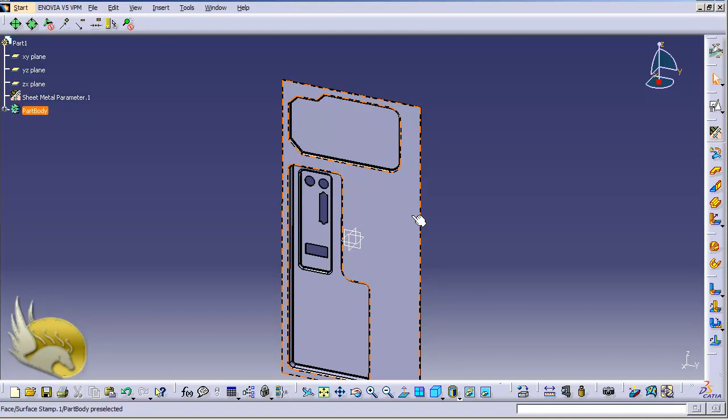Now the next thing that I want to create is the holes on this face for air ventilation. So I can go to insert menu, select cutting submenu, and can find hole tool here. The first thing I want to do is to click somewhere here, for example here, and now you can see that this is the exact tool that you use when you are creating holes on solid objects.

So this is easy to click on this position sketch and sketch out the point that you want to have. Or you can do as I do. I can select this face and go to sketch environment. This is my preferred point because I can click on a point and put the point somewhere and add some constraints to this point. You can see that this is selected.

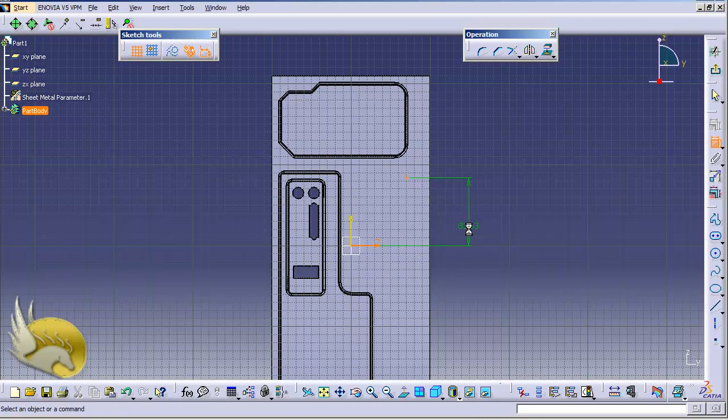I select the constraint tool and select the vertical or horizontal axis and put some constraints here. Both are going to be 80 millimeters. So this is the point, this is the vertical axis, and it is going to be 80 millimeters as well. Now by selecting this and fully defining this point, I can get out.

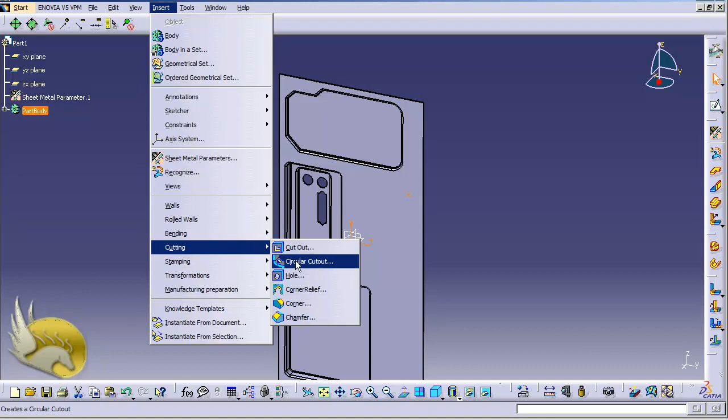I can go to insert menu, and by selecting insert menu and going to cutting submenu, I can select the hole tool. Under hole tool, I can select the face. And now that I have selected the face, instead of selecting this point, I want to select this point. Or let's cancel this out. Better to go to insert menu again, go to cutting and hole. And first of all, select the point instead of selecting the face.

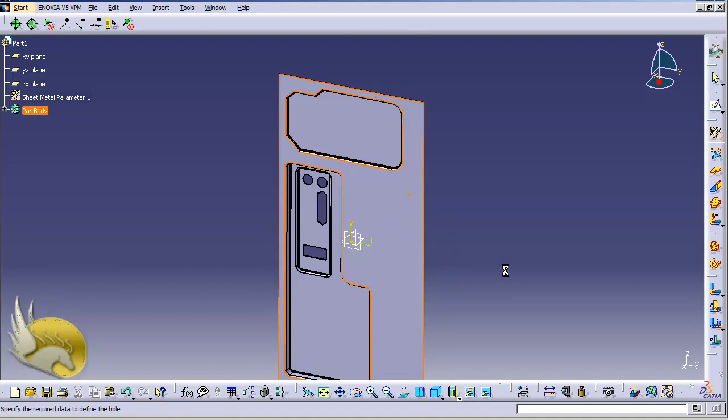By selecting the point and then selecting the face, you can see that the point is exactly where I want to have it. The diameter of this point is going to be 6 millimeter. And the depth, I don't want to have depth because I want to select it from up to last type. So by clicking on OK, you can see that there is a hole here. Okay, I can open the part body, go and hide sketch 6, and you can see that the sketch is gone.

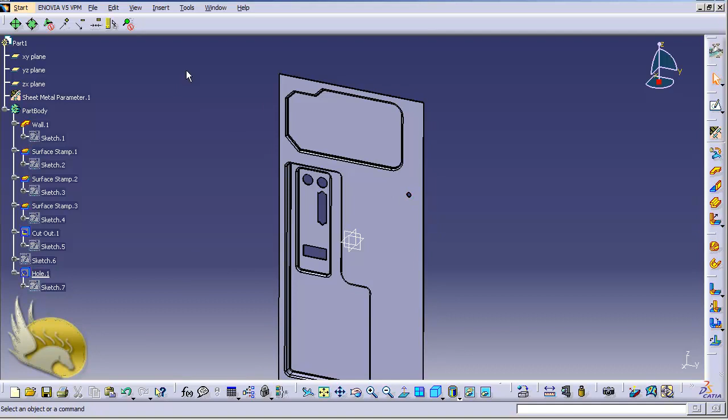The next thing I want to do is this. I want to replicate this hole. So I will go to insert menu, go to transformation and select a rectangular pattern here. The first thing I want to select is the hole that is going to be replicated. The hole is selected. Now I can have 12 instances in one direction and 8 instances in this other direction. So in first direction I select 8 instances, and they are going to be 12 millimeters away from each other.

I highlight the reference element, and this is going to be my first direction. You can see a preview of this. If you're not happy with that, you can click on this little arrow and this will change the direction, but I'm happy with that because this is the correct direction.

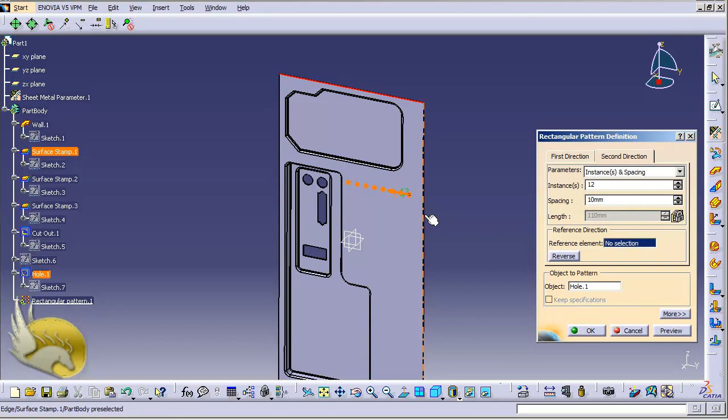Now I go to second direction because I want to have different rows of this. I want to have 12 rows, and each row is going to be about 10 millimeters away from the other one. And the reference element is going to be, for example, this line. I can see that the correct direction is selected.

That's okay for me. If you want to remove some of these holes, you can zoom in, and you can find some points inside these holes. If I click this point, you can see that this hole is going to be removed. If I click again on that, you can see that the hole is coming back. Now by this, I can have some patterns of my selection. That's okay for me. I can click on OK.

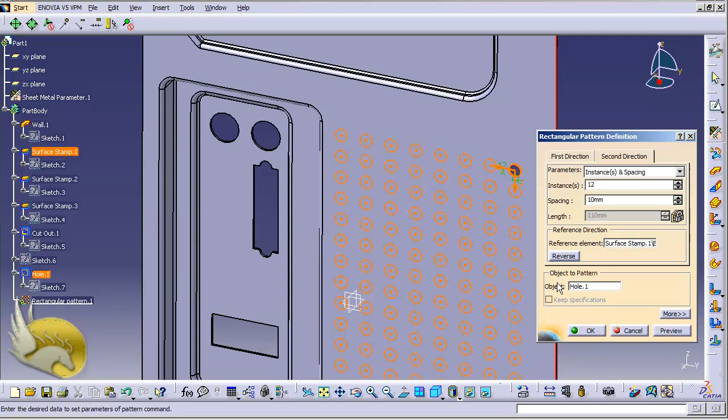Now the holes are generated for me. Okay, let's zoom out and pan down a little bit. Select this face. I want to cut some other types of holes here. So I go to sketch environment and start drawing an elongated hole here.

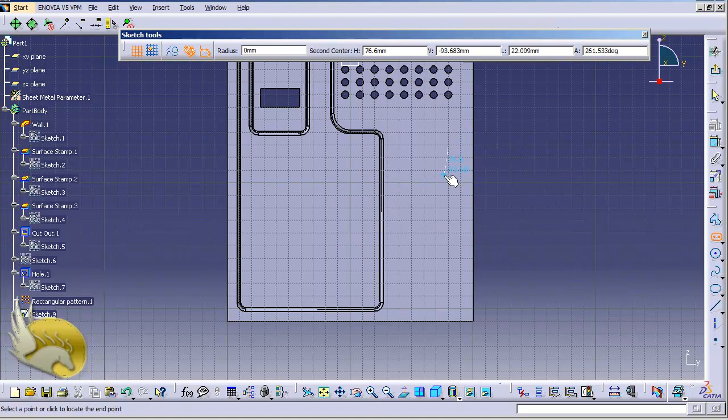So I can go to insert, go to profile and select the elongated hole here. Let's find the elongated hole, and I draw an elongated hole here. Let's zoom in because I want to have some constraints here, or I draw this like this and have this like this. By paging up, I can go and remove this constraint. I don't want to have this.

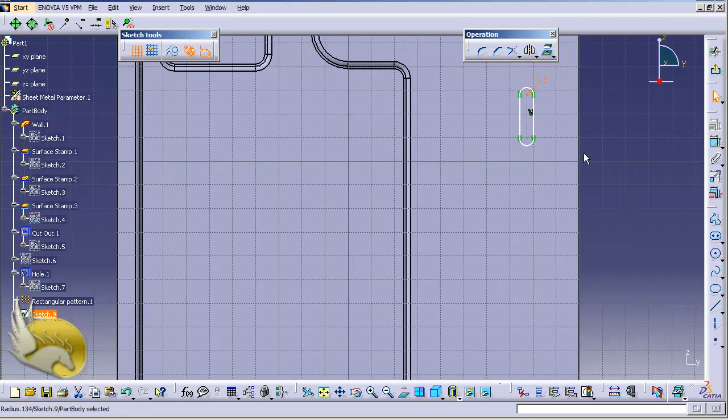By removing this, I can select the circles, and the diameter is going to be 6, so the radius is going to be 3, and this line is going to be 15 millimeters. So I double click on this and make it 15.

Now I want to have some constraints, and this is going to be about 85 millimeters. For example, I can select this line and select this vertical line and add a constraint here. This constraint should be 85.

And I want to select this top point, that means the center of the upper arc, and select this horizontal vector and add another constraint. This constraint is going to be about 70 millimeters. Now that's it. So I exit my workbench.

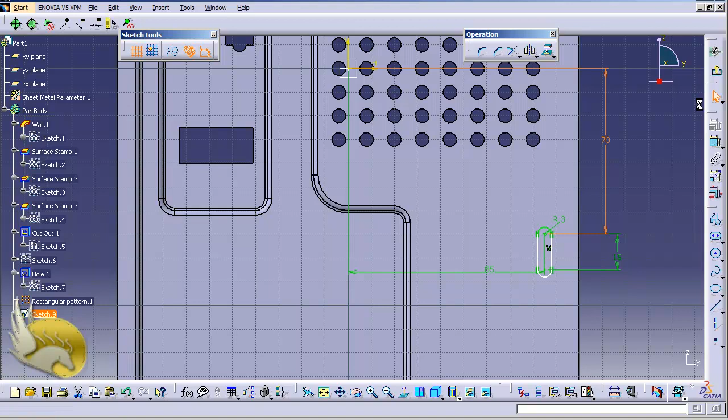I will select cut out tool, and up to last is the type that I want to have. I click on OK, and this is created for me. Now I want to replicate this as well. So I go to insert menu to transformation and select rectangular pattern.

Select this cutout tool, that is the hole that I just created, and I want to have 4 instances in one direction, and that direction is going to be, for example, this direction. Let's change this to 15 millimeters, and reference elements highlighted, and this is going to be the direction, for example.

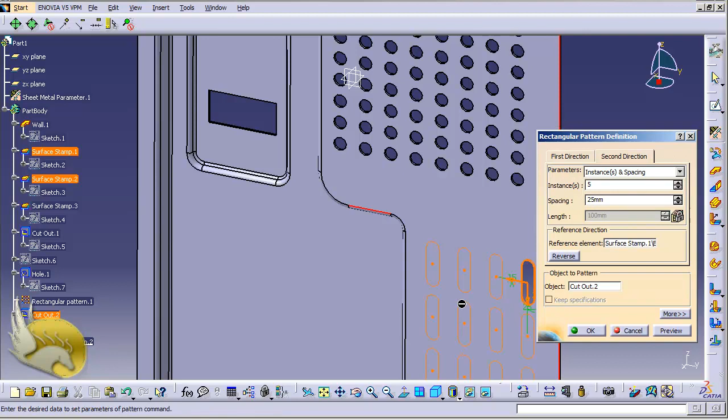And in second direction, I want to have about 5 instances by 25 millimeters of distance. And again, I click this, and I can see that the direction is correct. If it is not correct, I can click on these little arrows. I click on OK. Now I have created these holes here.

Okay, by selecting this face, I want to create a sketch that is going to be used for slots. So select this face, go to sketch environment, and draw a very simple rectangle here. This rectangle is going to be like this, and it is going to be 100. And let's double click on this and make it 100 by 10. So this is 10.

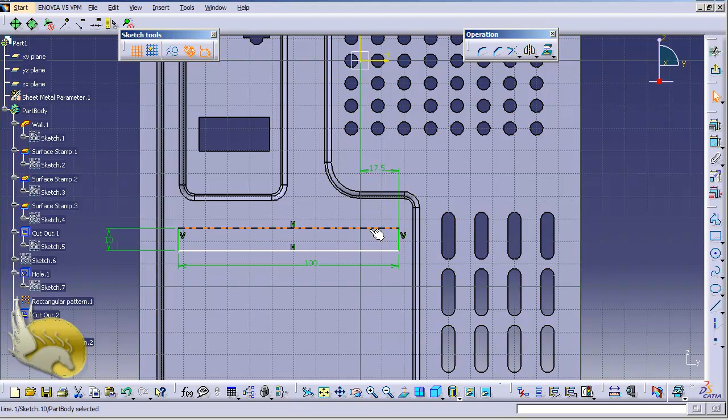Now I need some more constraints. The right line, by selecting this vertical, I want to add this constraint here and double click on this. I want to make sure that this is about 17.5. And the other line, the top line, and this horizontal vector are going to be about 75 millimeters. So I type in 75 and exit.

Now I exit my workbench, select the cutout tool again. You can see that I'm selecting the same tool several times because I am doing a very simple thing. So this is selected by default. Again, I should go to transformation and select the rectangular pattern.

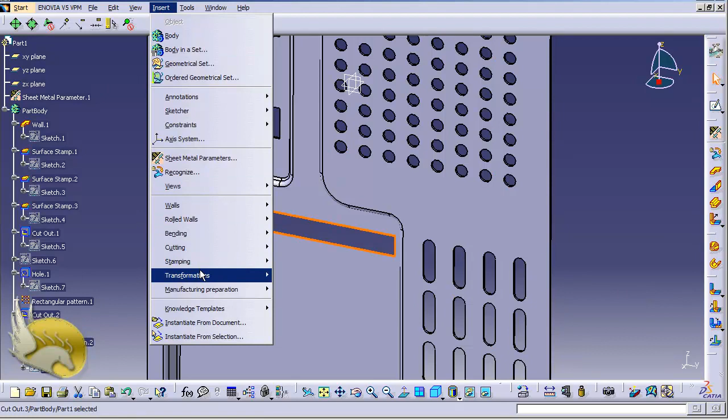And I want to have about 7 instances, and between each of them I want to have 18 millimeters, and the direction is this. I select this direction. You can see that the correct direction is selected, and I click on OK.

Now let's zoom out a little bit and see what it is looking like. That very nicely creates a shape here. And let's do the rest in the next section.